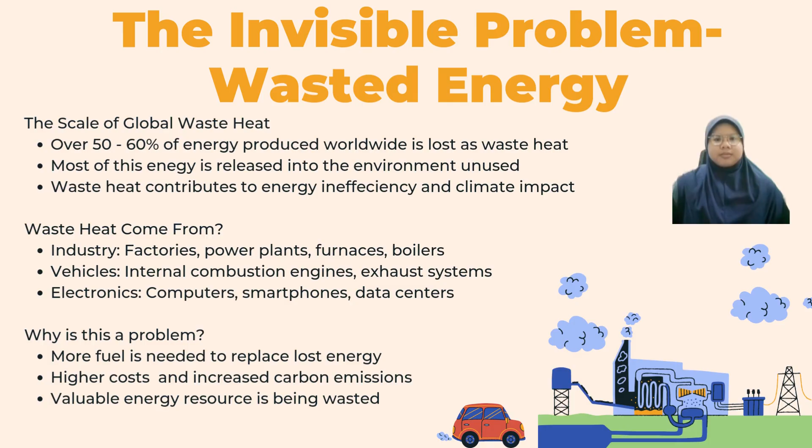The problem with waste heat is not only inefficiency, it also leads to high fuel consumption, increased operating costs, and greater carbon emissions. As energy demand continues to grow, wasting such a large amount of energy is no longer sustainable. Now that we understand the scale of the wasted energy, the next question is how we can convert the waste heat into electricity. This is made possible through a physical principle known as the thermoelectric effect.

The thermoelectric effect allows heat to be converted directly into electrical energy without any moving parts. When there is a temperature difference across a thermoelectric material, with one side being hot and the other side being cool, charge carriers inside the material gain energy on the hot side and move toward the cool side. This movement of charge creates an electrical voltage. One of the most important aspects of this process is that it is very reliable and low maintenance. Because there are no moving mechanical components, thermoelectric systems can operate silently and for long periods without significant wear.

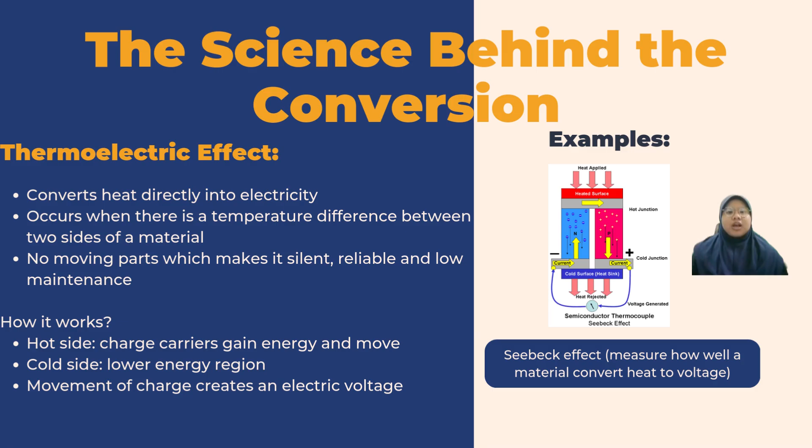The key material property that determines how effective this process is, is called the Seebeck coefficient. The Seebeck coefficient measures how much voltage is generated for a given temperature difference. Materials with a higher Seebeck coefficient can produce more electrical power from the same amount of heat. Now that we understand the introduction of waste heat, I will explain the physics behind the solution.

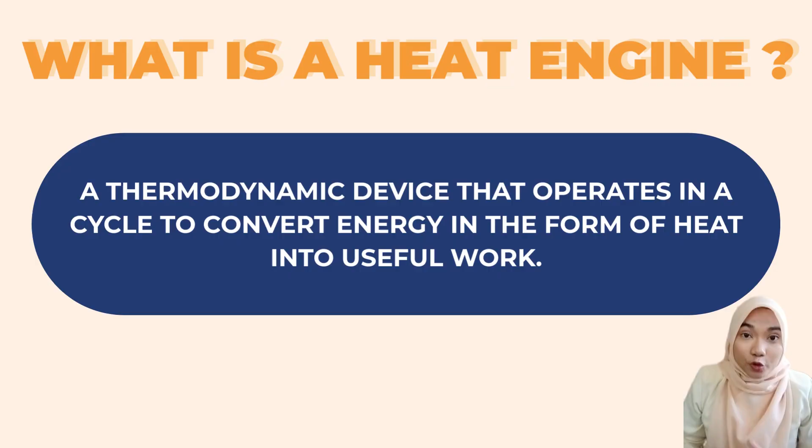So, what is a heat engine? To analyze the thermoelectric generator or TEG, we must first view it through the lens of a heat engine. By formal definition, it is a thermodynamic device that operates in a cycle to convert heat into useful work. TEG fits this definition perfectly through 4 essential characteristics.

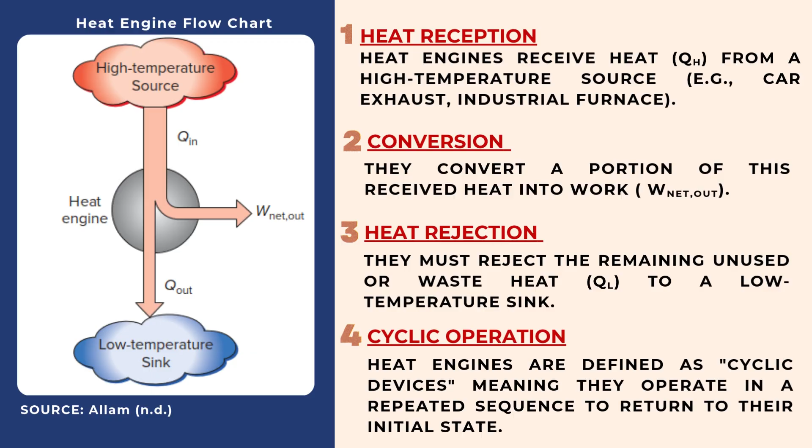Firstly, heat reception. It receives heat from a high temperature source, such as an EV battery or car exhaust. Secondly, conversion. It converts a portion of this heat into electrical work. Thirdly, heat rejection. Crucially, it must reject the remaining waste heat to a low temperature sink like the ambient air. Lastly, cyclic operation. It operates continuously, returning to its initial state to repeat the process.

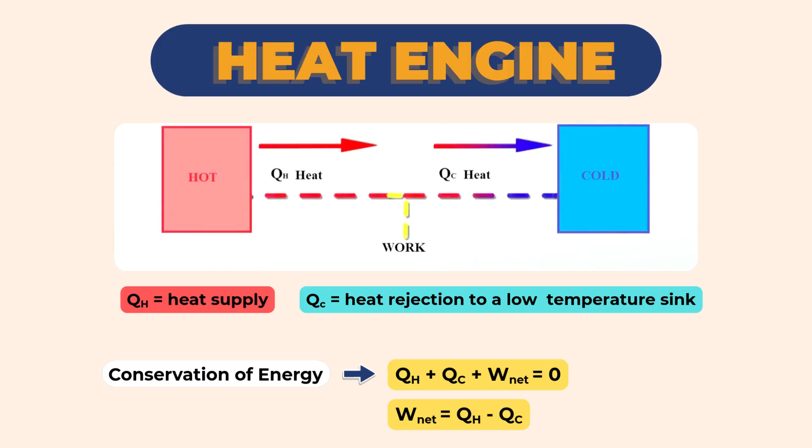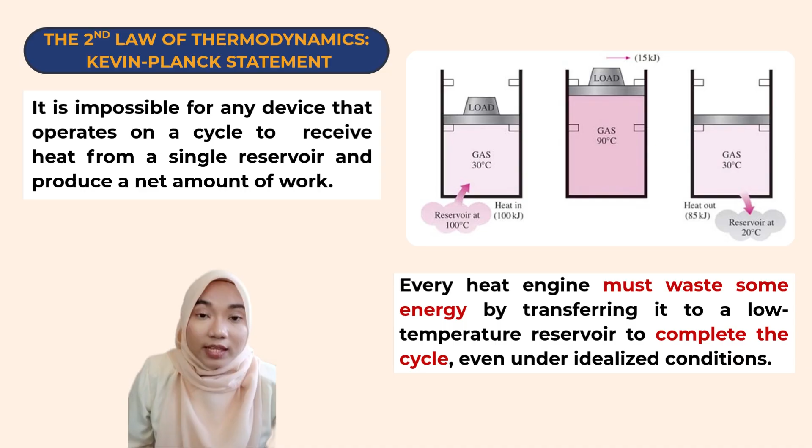This leads us to the second law of thermodynamics and the Kelvin-Planck statement. It reminds us that no device can be 100% efficient. We cannot convert all heat into work. Every heat engine must waste some energy to a low temperature reservoir to complete the cycle. In an electric vehicle, this is highly relevant. While EVs don't have traditional exhaust, the battery and power electronics get very hot during operation.

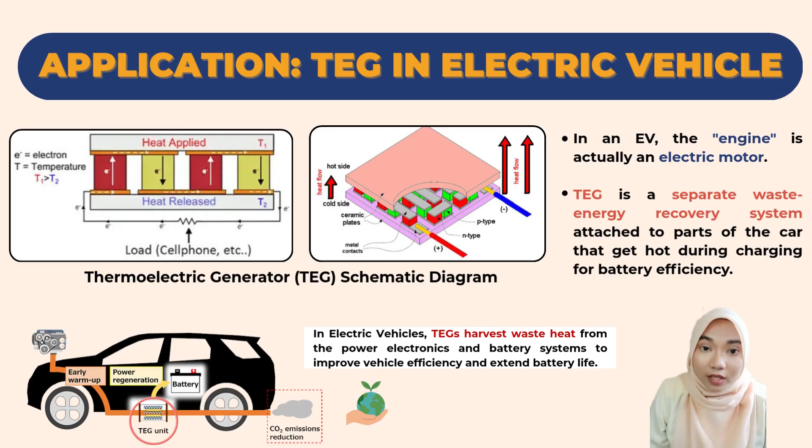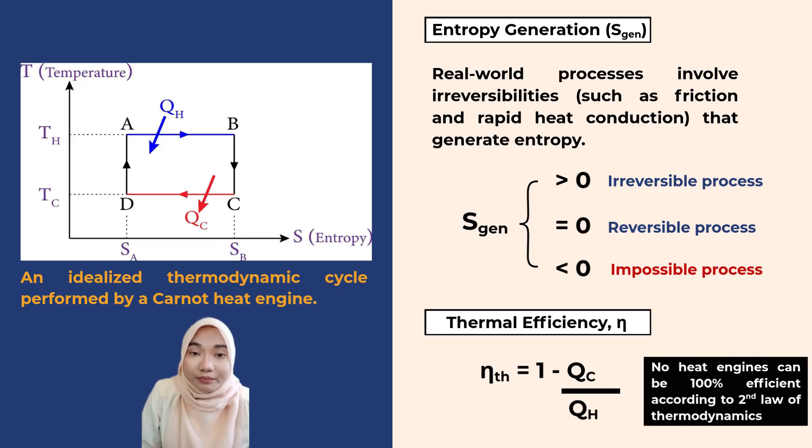By placing a TEG between these hot components and the cool outside air, we create a temperature gradient. The second law tells us that the larger this gradient, the more potential we have to harvest electricity, which directly extends the car's driving range. For a deeper insight, we look at the temperature-entropy diagram. The goal is to move as close as possible to the theoretical Carnot efficiency, turning what was once waste into usable power. Next, Auni will take over to explain challenges and limitations.

Assalamualaikum warahmatullahi wabarakatuh. My name is Auni Iriani and today I will present the challenges and limitations of energy harvesting. Although waste heat is widely available, converting it into electricity is not easy. The main challenge is low conversion efficiency. Thermoelectric generators are limited by fundamental thermodynamic laws. So in real applications, only 5 to 8% of the waste heat can be converted into electrical energy.

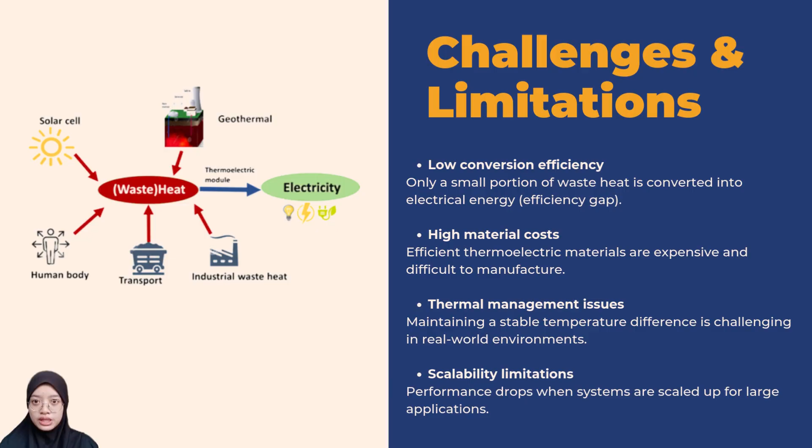Another challenge is high material cost. Efficient thermoelectric materials such as bismuth telluride perform well but are too expensive and not suitable for large-scale deployment. In addition, thermal management is critical. A temperature difference between the hot and cold side must be maintained. If the cold side heats up, the temperature gradient decreases and power generation drops. This limitation makes large-scale power generation difficult.

Despite these challenges, the future of waste heat energy harvesting is promising. One important direction is integration with the Internet of Things, where small thermoelectric devices can power sensors continuously without batteries. Research is also moving forward towards flexible and organic thermoelectric materials, which are lighter, cheaper, and more environmentally friendly than traditional materials. From the sustainability perspective, harvesting waste heat helps reduce energy loss and lowers carbon emissions. Even though the power output is small, large-scale adoption can contribute significantly to energy efficiency and environmental protection.

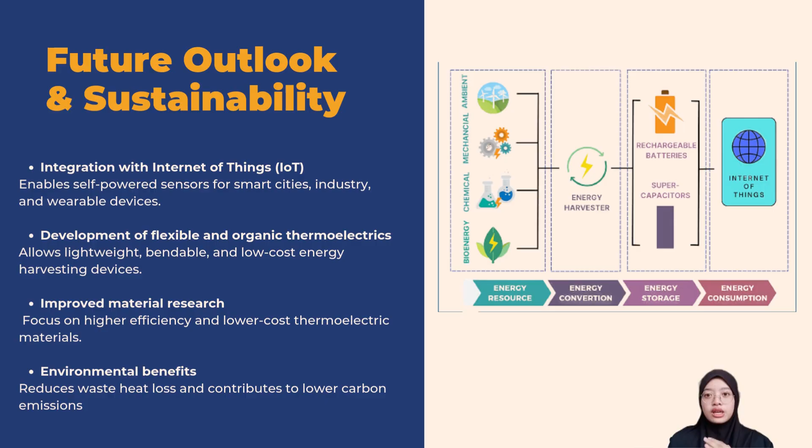In conclusion, waste heat represents a significant but underutilized energy resource. Thermoelectric energy harvesting applies fundamental heat engine and thermodynamic principles to recover part of this lost energy. Although the efficiency is limited by entropy generation and material constraints, and it is not suited for large-scale power generation, continued material innovation and integration with IoT technologies make waste heat recovery an important contributor to future sustainable energy systems.